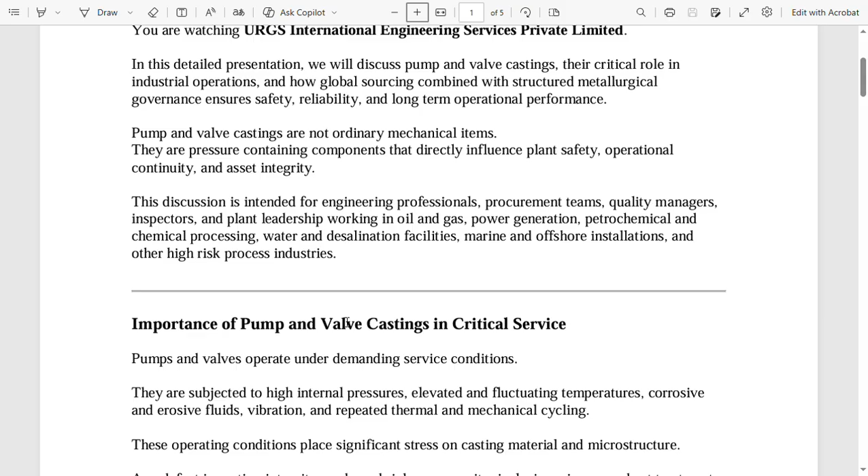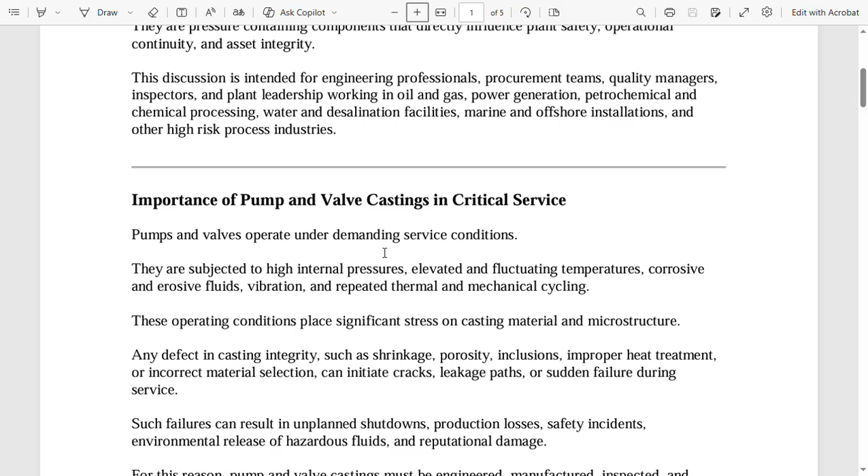Importance of pump and valve castings in critical service. Let us see. Pumps and valves operate under demanding service conditions. They are subjected to high internal pressures, elevated and fluctuating temperatures, corrosive and erosive fluids, vibration, and repeated thermal and mechanical cycling. These operating conditions place significant stress on casting material and microstructure.

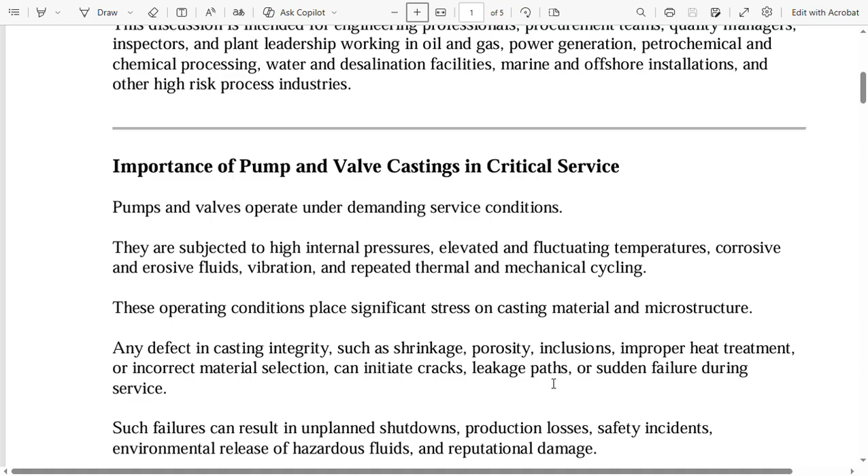Any defect in casting integrity, such as shrinkage, porosity, inclusion, improper heat treatment, or incorrect material selection, can initiate cracks, leakage paths, or sudden failure during service. Such failures can result in unplanned shutdowns, production losses, safety incidents, environmental release of hazardous fluids, and reputational damage.

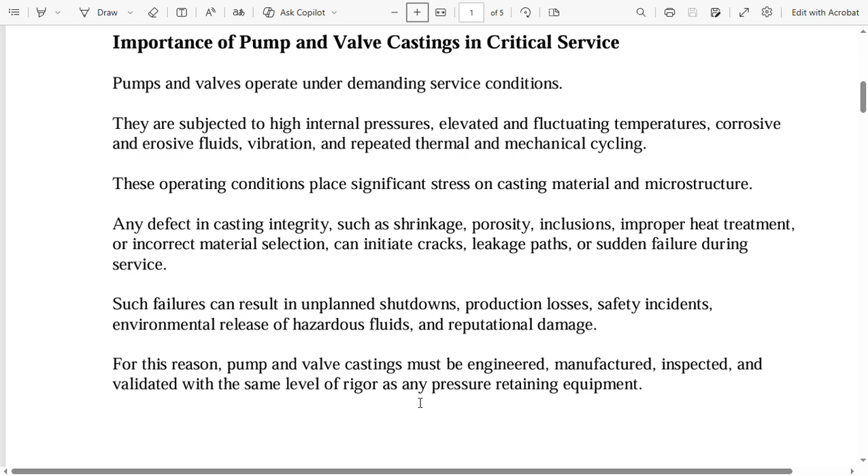For this reason, pump and valve castings must be engineered, manufactured, inspected, and validated with the same level of rigor as any pressure retaining equipment. At URGS, we approach pump and valve castings as safety critical engineered components, requiring technical control at every stage.

Now, global sourcing through approved and audited manufacturers. URGS International supplies pump and valve castings sourced from approved and technically audited manufacturers across the globe. Our sourcing strategy is based on engineering qualification rather than commercial convenience. Each foundry is evaluated for its metallurgical capability, melting and refining practice, furnace control, molding and pouring systems, heat treatment facilities, inspection infrastructure, and quality management systems.

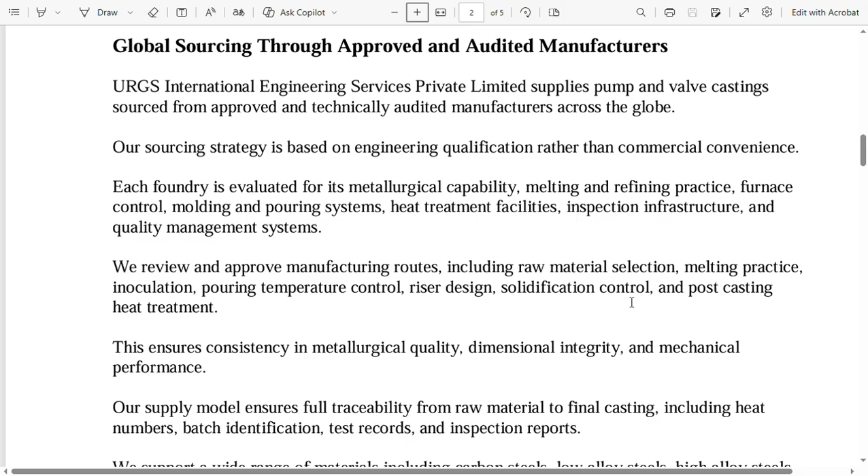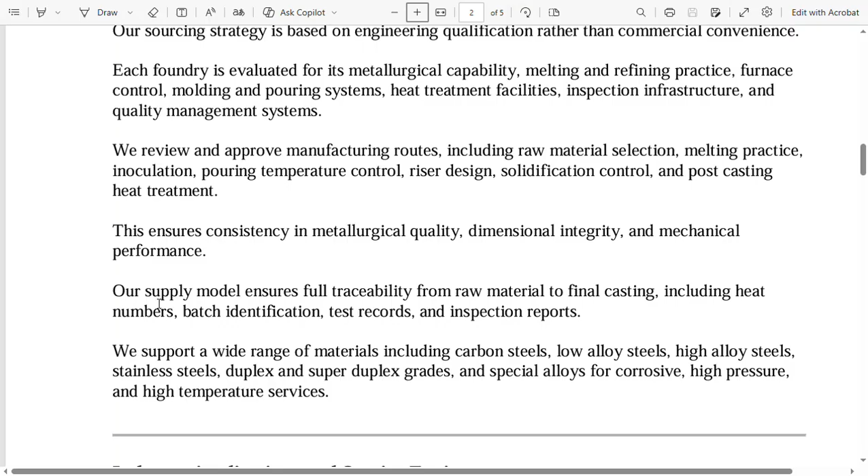We review and approve manufacturing routes, including raw material selection, melting practice, inoculation, pouring temperature control, riser design, solidification control, and post-casting heat treatment. This ensures consistency in metallurgical quality, dimensional integrity, and mechanical performance. Our supply model ensures full traceability from raw material to final casting, including heat numbers, batch identification, test records, and inspection reports.

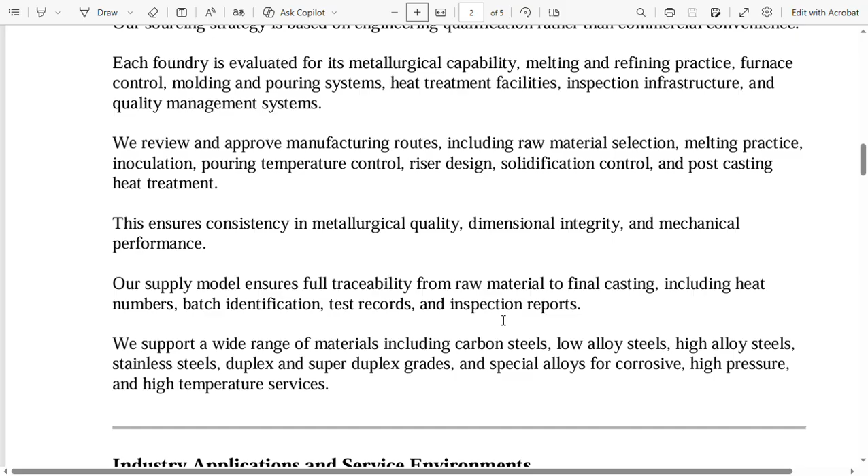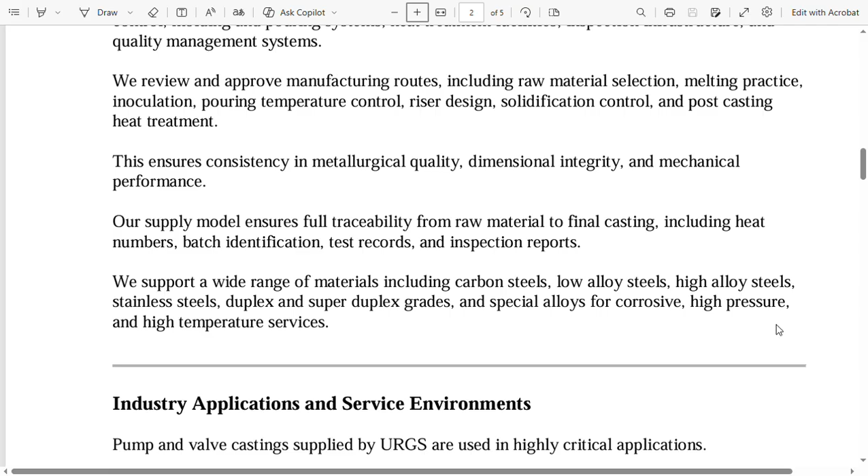We support a wide range of materials including carbon steels, low alloy steels, high alloy steels, stainless steels, duplex and super duplex grades, and special alloys for corrosive, high pressure, and high temperature services.

Industry applications and service environments. Pump and valve castings supplied by URGS are used in highly critical applications. In the oil and gas industry, these castings support upstream production equipment, pipeline systems, refining units, and utility services. In power generation facilities, they are used in feed water systems, cooling water circuits, auxiliary piping, and balance of plant systems.

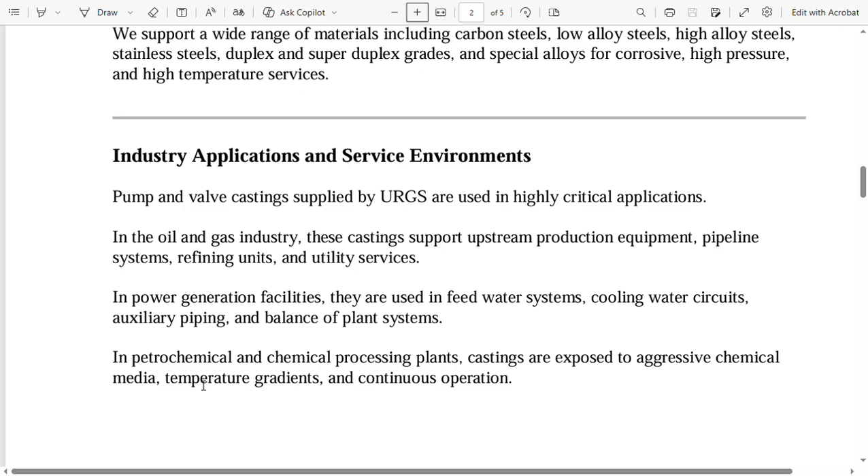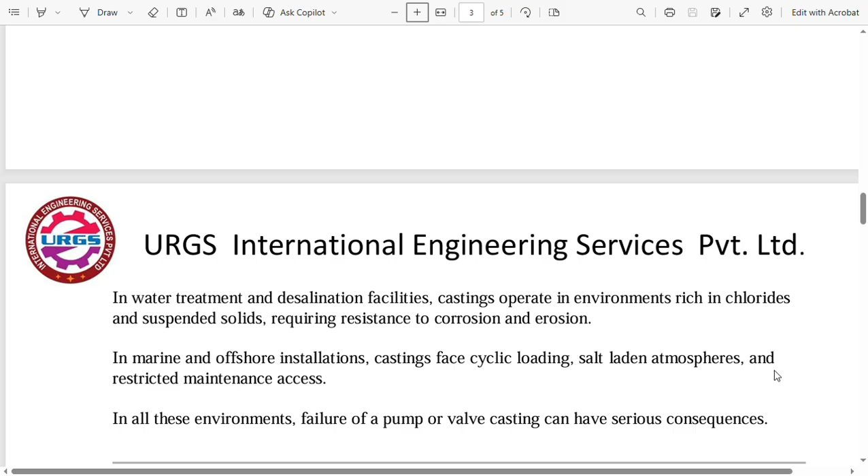In petrochemical and chemical processing plants, castings are exposed to aggressive chemical media, temperature gradients, and continuous operation. In water treatment and desalination facilities, castings operate in environments rich in chlorides and suspended solids, requiring resistance to corrosion and erosion. In marine and offshore installations, castings face cyclic loading, salt-laden atmospheres, and restricted maintenance access. In all these environments, failure of a pump or valve casting can have serious consequences.

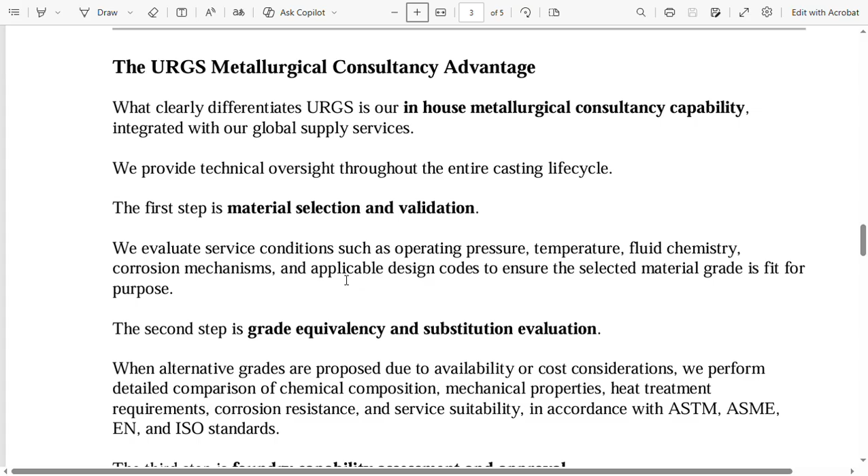Next, the URGS Metallurgical Consultancy Advantage. What clearly differentiates URGS is our in-house metallurgical consultancy capability, integrated with our global supply services. We provide technical oversight throughout the entire casting life cycle. The first step is material selection and validation. We evaluate service conditions such as operating pressure, temperature, fluid chemistry, corrosion mechanisms, and applicable design codes to ensure the selected material grade is fit for purpose.

The second step is grade equivalency and substitution evaluation. When alternative grades are proposed due to availability or cost considerations, we perform detailed comparison of chemical composition, mechanical properties, heat treatment requirements, corrosion resistance, and service suitability in accordance with ASTM, ASME, EN, and ISO standards. The third step is foundry capability assessment and approval. We assess melting practice, furnace control, deoxidation and refining, mold preparation, pouring control, heat treatment processes, and quality control discipline.

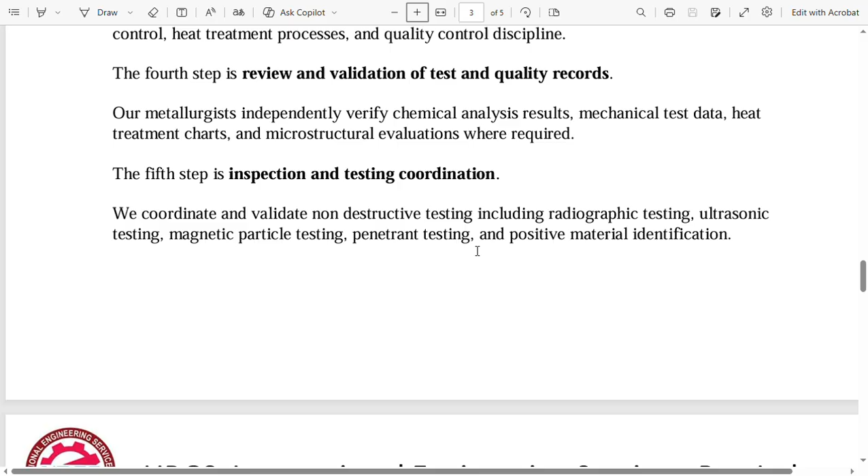The fourth step is review and validation of test and quality records. Our metallurgists independently verify chemical analysis results, mechanical test data, heat treatment charts, and microstructural evaluations where required. The fifth step is inspection and testing coordination. We coordinate and validate non-destructive testing, including radiographic testing, ultrasonic testing, magnetic particle testing, penetrant testing, and positive material identification. We also coordinate third-party inspections to ensure compliance with customer and regulatory requirements.

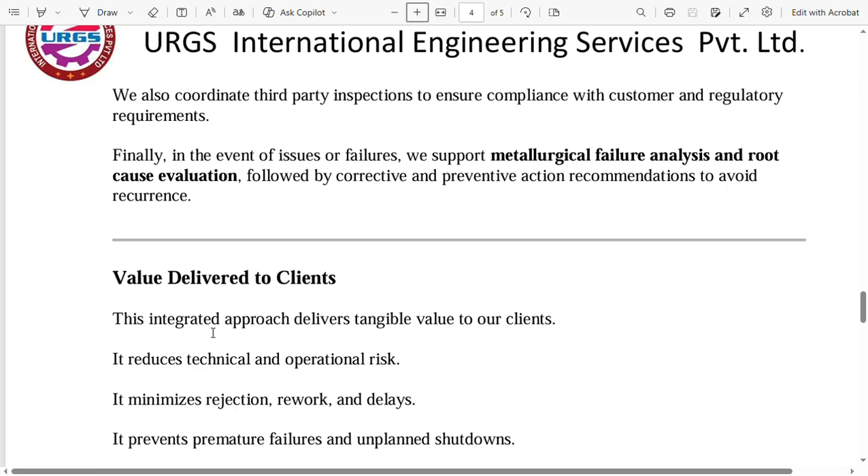Finally, in the event of issues or failures, we support metallurgical failure analysis and root cause evaluation, followed by corrective and preventive action recommendations to avoid recurrence. Value delivered to clients. This integrated approach delivers tangible value to our clients. It reduces technical and operational risk. It minimizes rejection, rework, and delays. It prevents premature failures and unplanned shutdowns.

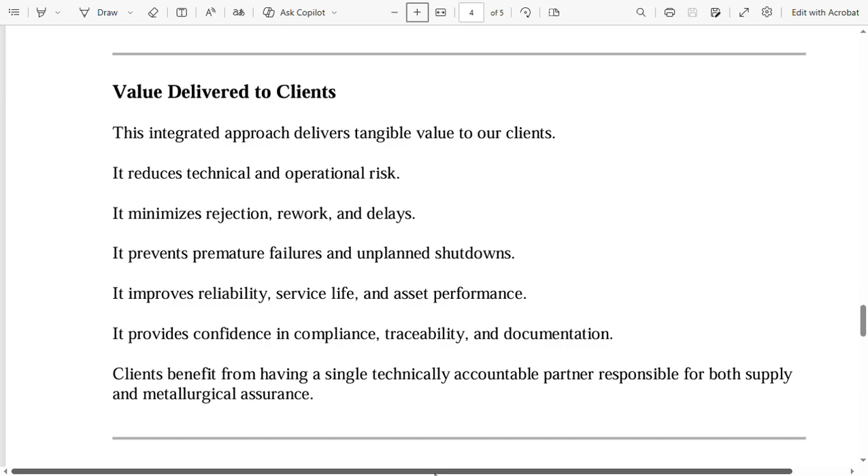It improves reliability, service life, and asset performance. It provides confidence in compliance, traceability, and documentation. Clients benefit from having a single technically accountable partner responsible for both supply and metallurgical assurance.

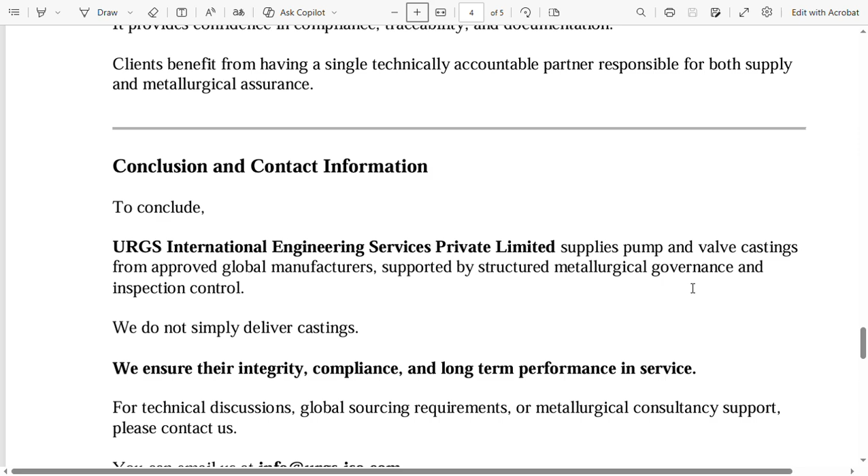Conclusion and contact information. So to conclude, URGS International supplies pump and valve castings from approved global manufacturers worldwide, supported by structured metallurgical governance and inspection control. We do not simply deliver castings, we ensure their integrity, compliance, and long-term performance in service.